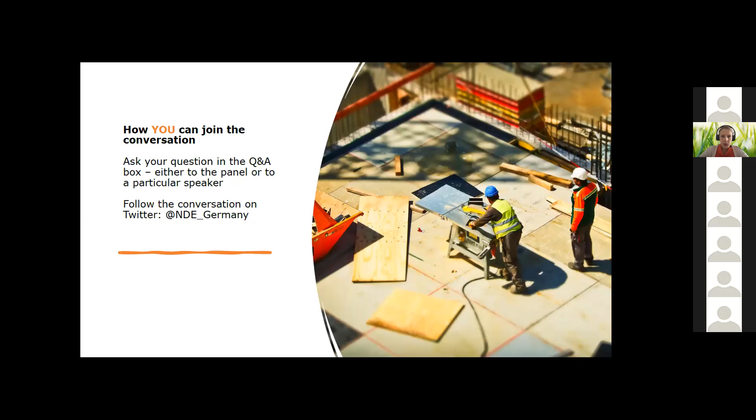As I said, this is a webinar series. So last week we looked at recycling and alternative materials. And I want to highlight again why we're looking at the building and construction sector. So as we know, roughly 100 billion tons of materials are consumed yearly, and 40% of it is for housing and infrastructure. And this also leads to a large amount of emissions.

So last week we heard from a representative of the Industrial Decarbonization Initiative that governments are committing to green public procurement for steel and cement in order to reduce these emissions. We also heard from Research C3, who developed carbon reinforced concrete, which provides 80% material efficiency and 50% less emissions, so an alternative building material.

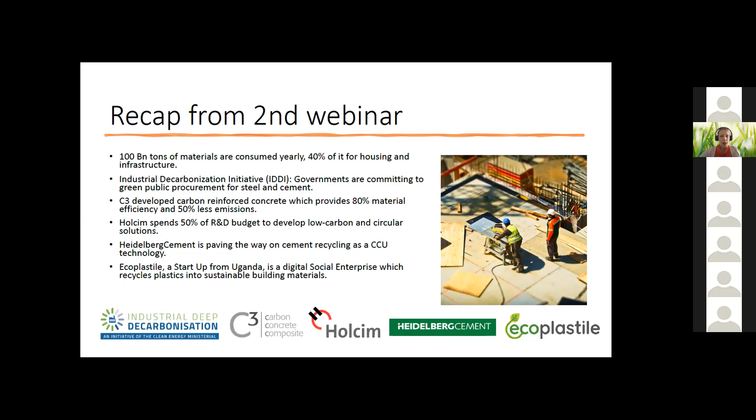We also heard from the private sector, from Holcim, for example, that they're spending 50% of their R&D budget to develop low carbon and circular solutions, and from Heidelberg Cement, who's paving the way on cement recycling as a carbon capture utilization technology. We also heard from Ecoplastile, a startup from Uganda, which is a digital social enterprise recycling plastics into sustainable building materials. In case you missed last week's discussion, have a look at our website and you can listen in.

So I'm very much looking forward to continuing the discussion today with our speakers. In discussion are Senta Schmatzberger from the Buildings Performance Institute Europe, Rose Mwebaza, the Director of the Climate Technology Center and Network, Christina Chiang from the Global Green Growth Institute, Will Hall from the UK Department for Business, Energy and Industrial Strategy, and Jan Kieso from the German Federal Ministry for Economic Affairs and Energy.

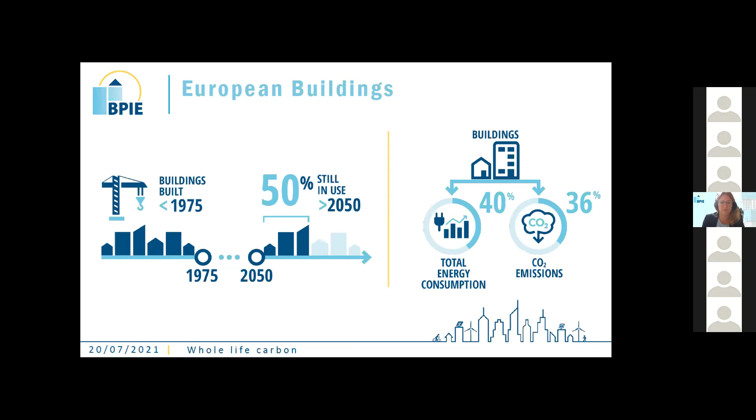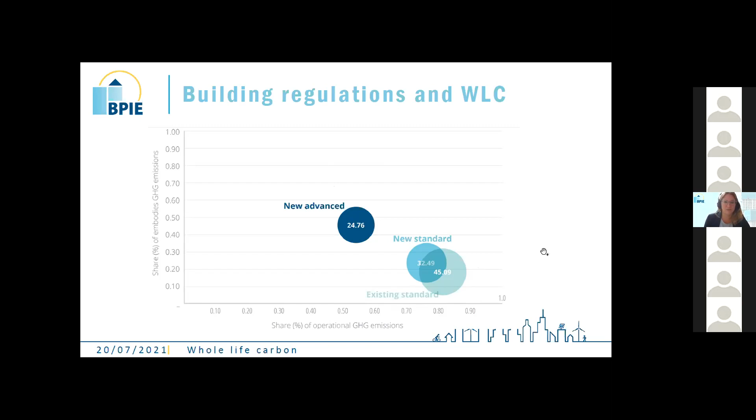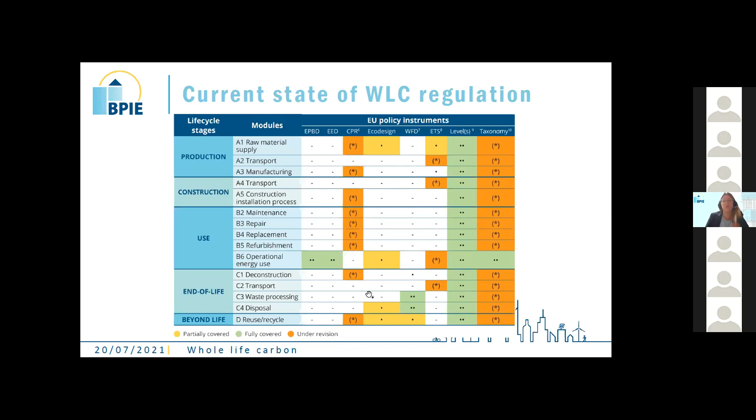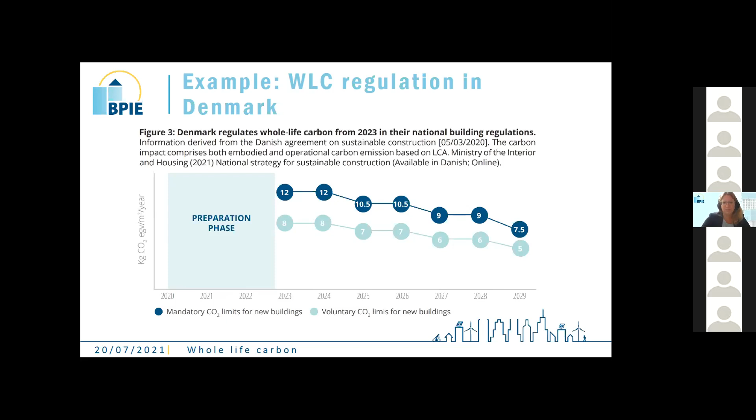Other countries have much higher amounts here also for the operational carbon, and of course other building stocks. So countries with more multifamily buildings, for example, which are in worse state, which were built before 1975 when there were no building regulations, of course have more problems than, for example, Denmark.

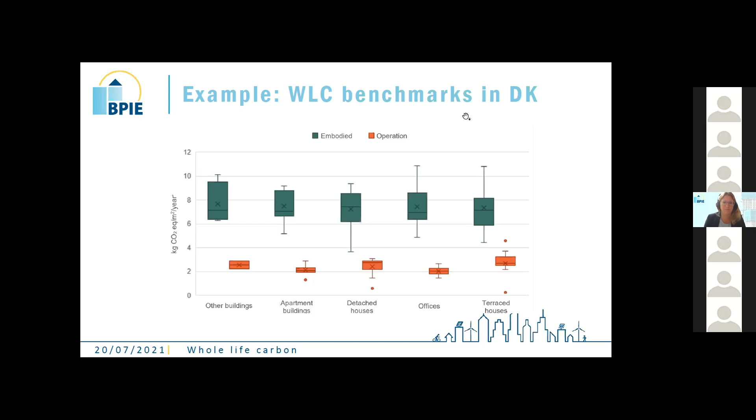Now, at BPIE, we've looked at the potential policy intervention points, and we've divided them by material and product level, building level, and then corporate and market level, because buildings is such a complex system, and there's so many different stakeholders involved, construction companies, architects, the owners of the buildings. So we think there are different stages where we have to apply different policy implementation. For example, on the material and product level, we believe there should be a material passport introduced, and that should be European legislation.

Product certification, there should be environmental product declarations. Of course data availability has to largely be increased, and that's one of the major problems for buildings in general, and also whole life carbon, is that in many countries we don't actually know what buildings there are and how much embodied carbon they have, because we don't have the data from the EPCs, from the energy performance certificates, to show what state the buildings are in. So this is a huge issue that we need to address.

Data availability and what kind of products have actually been built into these existing houses, and which products are being built into a house. Every new building should actually already have a material passport when it's finished, that is given also to the owners, and everybody should know how much embodied carbon the building has and what kind of environmental footprint this building already comes with from start, without any operational carbon that we're looking at.

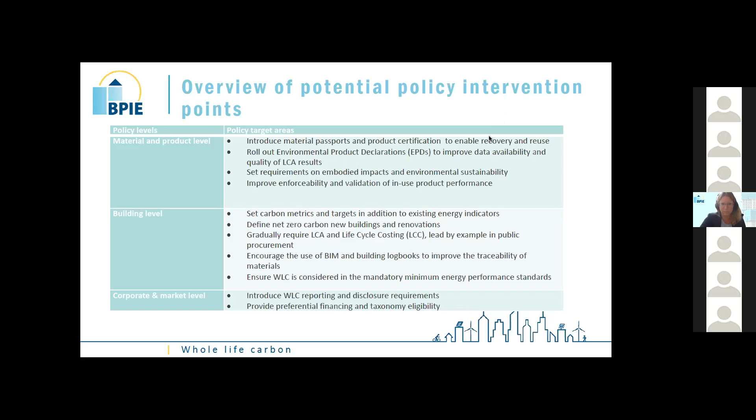Here you see the policy timeline and anchors for the European level. After the European level decides or revises certain legislation, the national level implements these revisions. The Renovation Wave strategy was published last year with a strong focus on whole life carbon integration, but it's a strategy and not binding for anybody. So we have the Fit for 55 climate package now, which included the EED revision and the ETS revision, which you see here for 2021 already.

And we have the Horizon Europe working program, which funds different research projects and is also going to fund a lot of whole life carbon research, and research into building logbooks, renovation passports, and material passports. So all of this is actually in a flow at the moment.

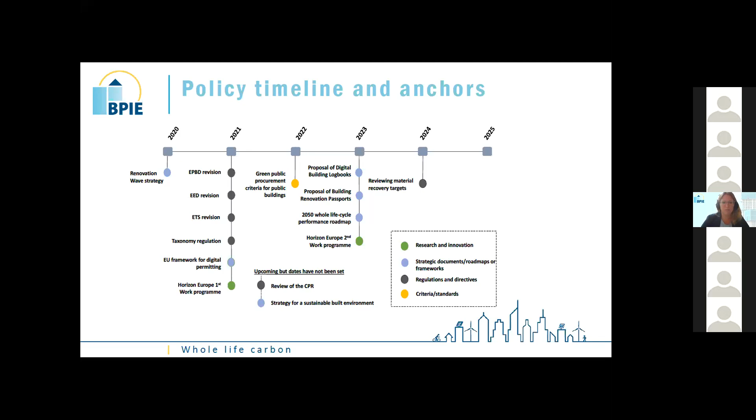And the EPBD revision of the Energy Performance Buildings Directive is upcoming in the fourth quarter of 2021. I think it will be interesting to see if the Commission actually includes a lot of whole life carbon measures or not. I'm not sure myself.

We've kind of put here some policy options: what to do until a vision of 2050, or nowadays we talk more maybe also about 2045, to reach carbon neutrality.

Currently, there should be a lot of preparation going on, preparing the ground for the introduction of whole life carbon metrics and adopting an EU-wide methodology. As I already said, with the NZEB methodology, we've seen that it doesn't really work to leave that to each member state. There should be an EU-wide standard, and we can build on standards we already have for different construction products and on the energy performance certificate.

So these should kind of be expanded. We need to introduce requirements for new buildings to report on the embodied carbon that they have. I already mentioned that. And there should be a clear timeline, because as we know in buildings, I think we cannot say that often enough.

Any building that's being renovated now in 2021 is not going to be renovated again before 2030 or even 2040. So what we do now should be as ambitious as possible to make sure that these buildings do not have to be renovated again, especially in terms of embodied carbon, and that we use sustainable materials.

I know it for Austria and Germany, for example: now everybody wants to build with wood, but wood is not indefinitely available either. There's already a shortage now of sustainable products. So we need to look at what's going on.

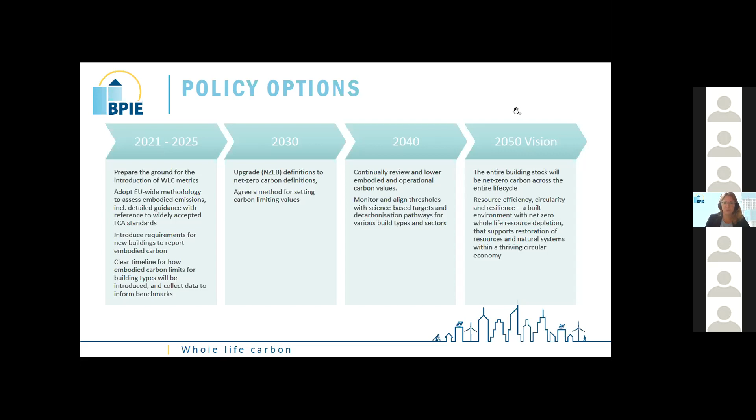I've just collected quickly some recommendations for the Energy Performance Directive, but I won't go through all of them. I think the presentation will also be made available. It's just to show again what we think needs to be implemented now in the Energy Performance Directive to make sure that we're on the right track, because these European Union processes are very long, and the recast of the EPBD will take two or three years.

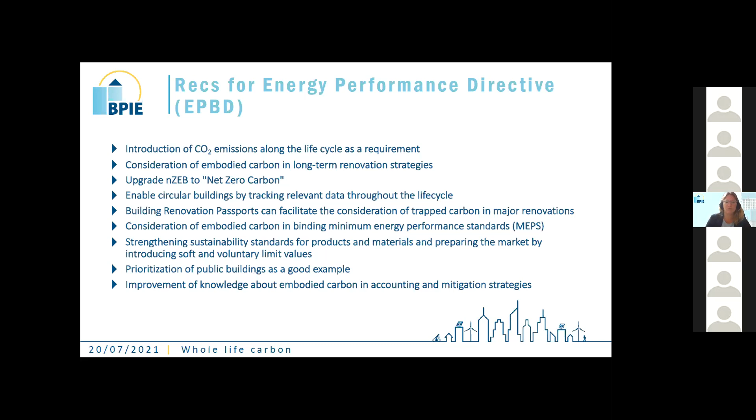So we need to see where we want to be in 2 or 3 years. And I think the points I've mentioned, tightening standards and showing a roadmap of how to get to a zero carbon building stock, is important to provide now to the people dealing with this.

And just to end, I think we have to look at the low-hanging fruits first to get some CO2 emissions out of the way. Looking at cost-effective measures is often the operational energy use, which has already largely been reduced.

We need to adopt life cycle approaches and give a lot of financial resources into this to begin with, to also start more best practice examples, and quick start, like startups in the construction industry, to help them change their production ways.

And we should start with carbon reporting requirements, build benchmarks, and set target values. Maybe start with voluntary measures, but show how these voluntary measures can be done, not only say 'do something as you wish', because that might not lead to a good standard.

And we should consistently increase the weight of non-price criteria in public procurement—environmental and quality criteria. I think public procurement and public buildings can lead the way, and also quick-start the market for sustainable building products in a way that private businesses often can't, because it's a huge market for them.

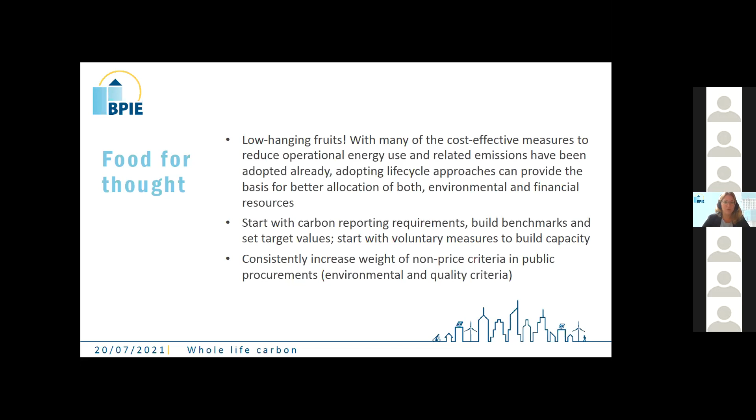Yeah, thank you, that was it. Happy to take any questions.

Thank you very much, Senta, for providing us with this great overview of building regulation and the European perspective. Julia, do we have one direct question from the audience to Senta?

We actually have a few questions. So the very first one is about one of your slides. The question is, what does eq stand for in eq per square meter per year?

Oh, sorry, now I... I'm not sure, I'll have to check that. Wait a minute.

Okay, then the other question would be, will embodied carbon be part of the EU Fit for 55 package? I mean, the Fit for 55 package was published last week, and I haven't had the chance to go through it in detail, but it's definitely in there.

And we're hoping that it will be part also of the EPBD. So the EPBD revision hasn't been published yet, the suggestions from the European Commission. But definitely, yes, it will be part of the Fit for 55 package, and will definitely play a role also in the EPBD revision. We just don't know to what extent yet.

Yeah, but that's good news then, if you're certain that it's going to be part of Fit for 55. It's always, I guess, for Europe, it's often also the question of how the formulation is in the European Commission document.

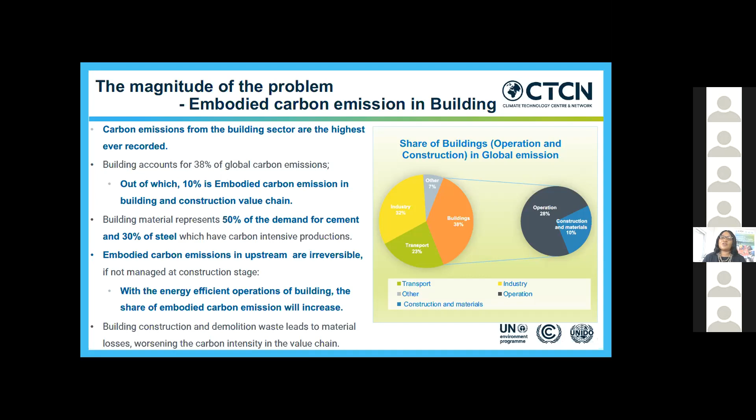So as I said, relative to other sectors, the building sector is really deleterious in terms of its contribution to carbon emissions, if you look at industry or transport or the other sectors.

For the work we do at the UN Climate Technology Center, we are generally guided by the policies of the member states at national level, especially their nationally determined contributions, or NDCs, as we call them.

When we did our last survey of the NDCs — we are currently analyzing the new NDCs — we found that indeed NDCs prioritize actions relating to decarbonizing the building stock. When we did our analysis, 136 countries did in fact mention buildings as important for climate action.

And I think the former speaker made an important point when she said we need to move really from just energy efficiency to carbon performance of buildings.

In terms of investment, we also know that investment in energy efficient buildings has increased to $150 billion US — those are 2019 figures — but it still remains outpaced by investments in conventional buildings. So for every dollar that is invested in an energy efficient building, in fact $37 is invested in a conventional building. So it's still a real problem in terms of our path to net zero.

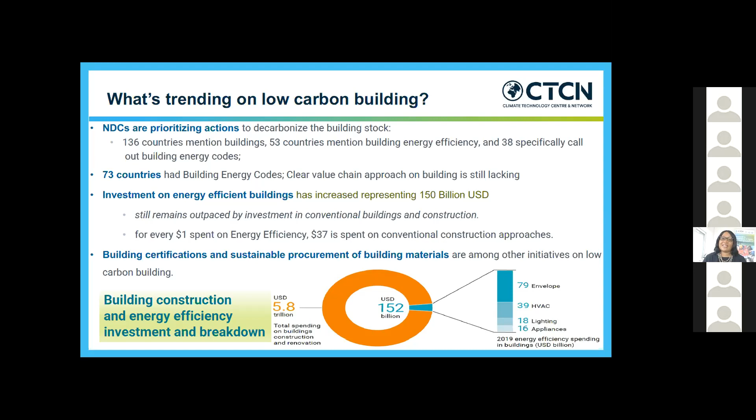So building certification and sustainable procurement of building materials are one of the key areas we are working on in terms of supporting especially developing countries.

Given that context, I'll share with you some of the work we are doing to support developing countries. Our mandate in the UNFCCC is to support developing countries, so all the examples I will give are based on the work we are doing in these countries.

The first example is from Thailand. We supported the government of Thailand to access Green Climate Fund readiness funding to enable them to achieve national targets for energy efficiency in the building sector as defined in their National Energy Efficiency Plan of 2015.

They also had this in their NAMAs and in their NDCs. Basically, what they wanted us to deliver for them is a detailed technology assessment in line with their current building energy code standards and future goals.

They wanted us to provide a technology performance evaluation across key building typologies most suited for Thailand. They have 5 building typologies in Thailand that they've identified as suitable for their landscape and climate.

They also wanted us to identify the threshold level of energy efficiency to create an investment baseline. So while allowing for the fact that investors in the building sector may not be able to reach the highest standards of efficiency for buildings, they wanted to set a baseline below which no investment in the building sector would be allowed.

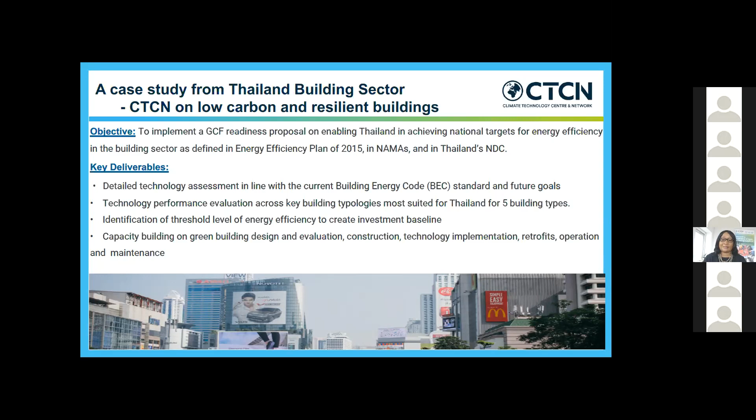In Thailand, what we found in supporting the government is that many buildings did not comply with the individual performance requirements of the building envelope, especially relating to lighting, air conditioning, and hot water generation systems.

We also found that there was a high degree of non-compliance, especially for walls, windows, and roofs relating to thermal transfer. So generally there was no compliance, even where the government had regulations as old as 2009.

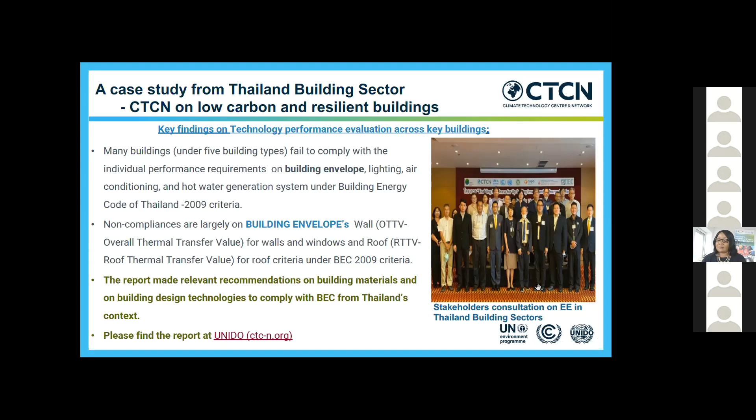So we did make several recommendations on how building materials and building design technologies can comply better with Thailand's building codes. We do have a full report of the support we've provided on our website.

The second example I'll give you of the support we've given to support green buildings is in Sri Lanka. We received a request from the government to support them to establish a pathway for transitioning the Kurunegala city, through capacity enhancement of city planners and policymakers, into a low emission municipality.

It was largely a capacity building request. And when we went in, we found some interesting things there. In Sri Lanka, green buildings comprise mostly of roof and wall designs that are enabled for efficient use of energy and eco-friendly construction materials.

That is the priority given by government. So in order for them to transition to a climate smart city, what we did is work with the government to develop a roadmap with proposed action plans on green buildings.

Here, we looked at city level expansion of policies with targets on greening public and private buildings. We worked with them on mandatory regulations for green building ratings and certifications. We also worked with the government of Sri Lanka on identification of energy intensive buildings through baselining, auditing and reporting.

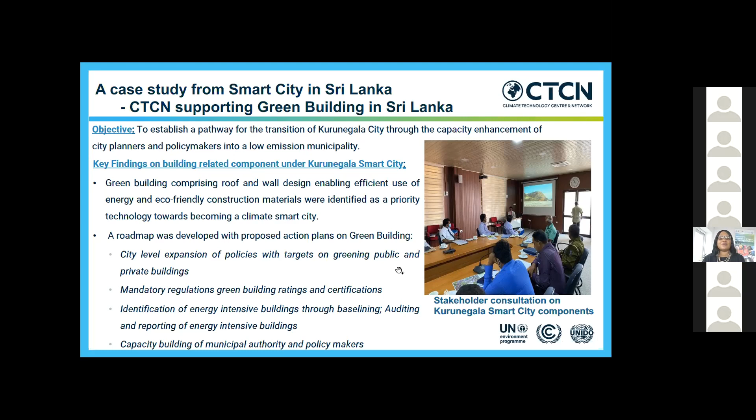The other example I will give before I close relates to a request we received from the government of Antigua and Barbuda. They approached us for support to build climate resilient buildings able to withstand Category 5 hurricanes, extreme flooding, and extended drought.

So what we did in responding to this request is work with the government of Antigua and Barbuda to conduct a technical assessment of all key government buildings, including hospitals, police offices, fire stations, and schools, as well as their key service inputs, which include food, water, and electricity.

We also identified with the government detailed interventions required to make the buildings resilient to the impacts of climate change and variability. Specifically, as I said, they were worried about hurricanes, extreme flooding, and extended drought.

We then provided a comprehensive costing of the adaptation interventions for the government, and made recommendations for policies and standards relating to building codes, among other recommendations, to help them achieve the best climate resilient goals. All this support we provided is to make this country more climate resilient.

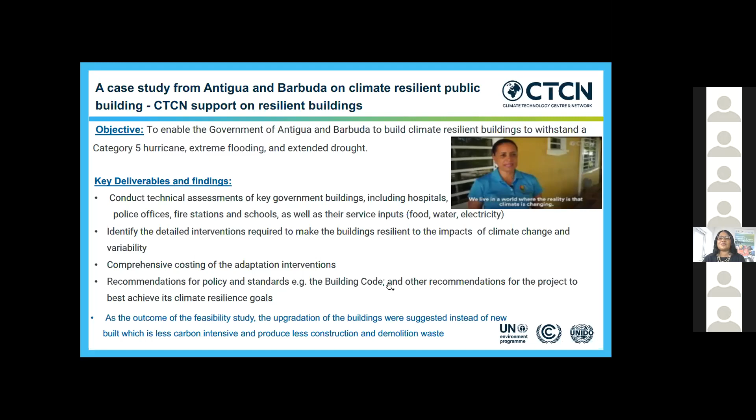It's one of the small island states that really suffers from extreme weather events. The last example I will give is in Kyrgyzstan, the Republic of Kyrgyzstan.

They approached us for support in enhancing building energy codes to institutionalize and standardize the energy performance of buildings, looking specifically at public buildings. So at their request, we benchmarked international practices on building energy performance with countries that had similar landscapes as Kyrgyzstan.

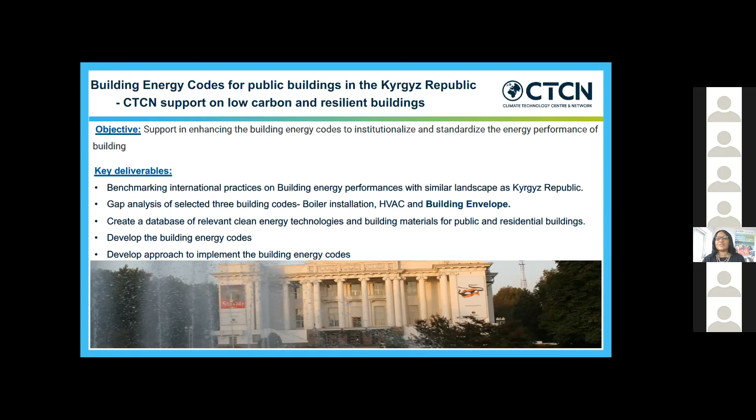We also undertook a gap analysis for them on selected building codes that the government identified. Then we created a database of relevant clean energy technologies and building materials for public and residential buildings—a repository of knowledge and technologies to help them plan. We then developed energy codes with them, and an approach on how they can implement the building energy codes. As I said, we are the operational arm of the UNFCCC.

Our support to member states is very practical—it's policy work, it's access to technology. And so what we see in the work we do is that technology development and innovation definitely have the potential to play an important role towards low embodied carbon buildings. But the technological transfer must be accompanied by appropriate policies and regulatory standards, including codes.

So designing innovative circular materials and products that can be recovered in closed loop processes can reduce the demand for construction materials, and this is something we're increasingly working with countries to integrate into their planning. We also communicate to countries that smart selection of materials for components and structures, with minimized life cycle impact using material libraries, is also important.

There's also right-sizing and lightweighting of components and structures. We've talked about wood—there are all those options, but the idea is to promote environmentally sound technologies and materials. So wood, unless it's sustainable, is something we ask countries to consider carefully. We also ask them to consider use of thermal properties for construction, as well as structures with extended lifespans.

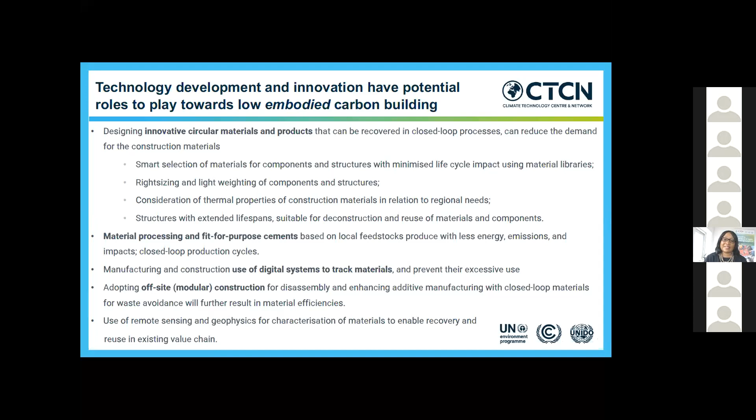Lastly, we are also encouraging the use of remote sensing and geophysics for characterization of materials to enable recovery and reuse in the existing value chain, because many of these countries will not be able to build new buildings. They should be able to retrofit current buildings, or at least recycle or recover some of the material they are using. So I'll stop here for now, and I'll be happy to take a few questions on some of the work we are doing in the countries we support.

So rather than share about our project results, today I'm going to share mostly about a study we have been doing this year. We have been talking with stakeholders in a few of our member countries about their transition towards green buildings.

This study quite deliberately takes an open approach to green buildings. We did not define what green building should be, and these were teased out during our discussions with local stakeholders. In these studies, we tried to engage more with key industrial champions or government officials who were responsible for such transitions, and in some countries we spoke with academics who were very vocal about promoting such a transition in their countries.

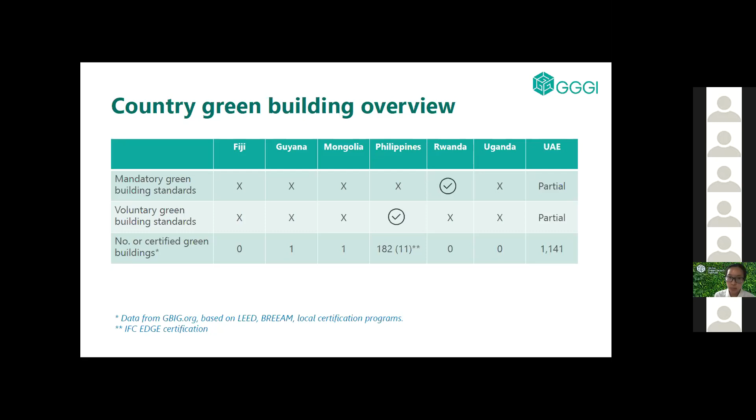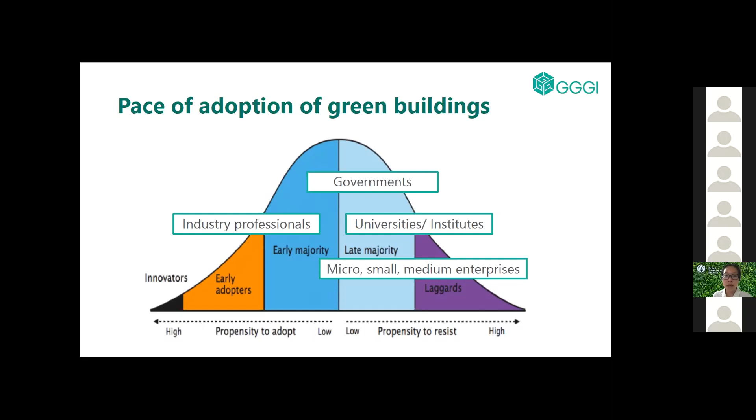Following from that, our study also has shown that in the different countries, with their different constraints but also different opportunities, there are different pathways towards green buildings. And we're not talking about one single project, but leading towards a mainstreaming of green buildings in the different countries.

Sometimes this transition is government-led, and when it is government-led, it's top-down. It comes with a policy, it comes with a green building rating system, it comes with compliance requirements, but it often also comes with incentives and penalties. There will be resources provided by government to build capacity, to reward those who comply, reward those who excel. And so these resources can promote the adoption of new technologies and new design methods.

When it is industry-led, this has tended to be a bit slower and more constrained in terms of resources for the transition, so it doesn't reach the smaller and medium enterprises. It often comes with the bigger projects, bigger and more well-resourced developments. And these can slowly create a momentum, an economy of scale, so that prices for green buildings or greener technologies can gradually become more affordable for other developments and other retailers.